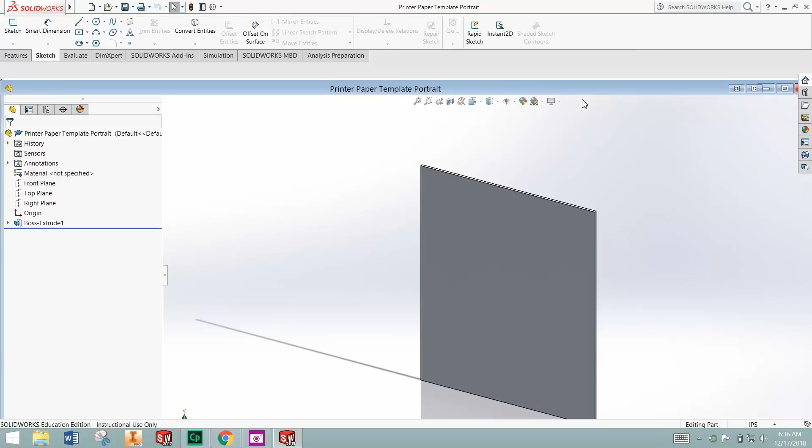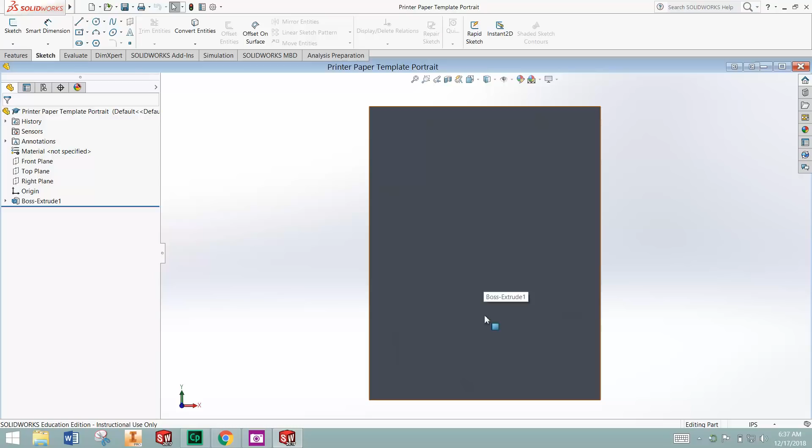So here is the starting design constraints. Everybody is restricted to an 8.5 by 11 piece of paper, your 8.5 by 11 construction paper or cardstock. To get started with this, you are going to be right-clicking on the blank or flat surface of this. So I'm going to right-click, and then you'll click on the second button of the second row. This says Sketch. Once you select that, you'll be able to start sketching or drawing your design.

Anytime we do anything in a CAD program that's going to be 3D shapes, even though we're cutting this out of flat paper, we're going to create a 3D design here in Solidworks to begin with. We always start with a sketch. So we're going to be sketching 2D lines and text boxes and importing an image, and I'll show you how to do all of that. Your primary tools will be used up here in the top left corner. These are all of these sketch tools. You'll be able to create different shaped circles and arcs and lines. Maybe if you wanted to make a snowman, you can do that with different circles.

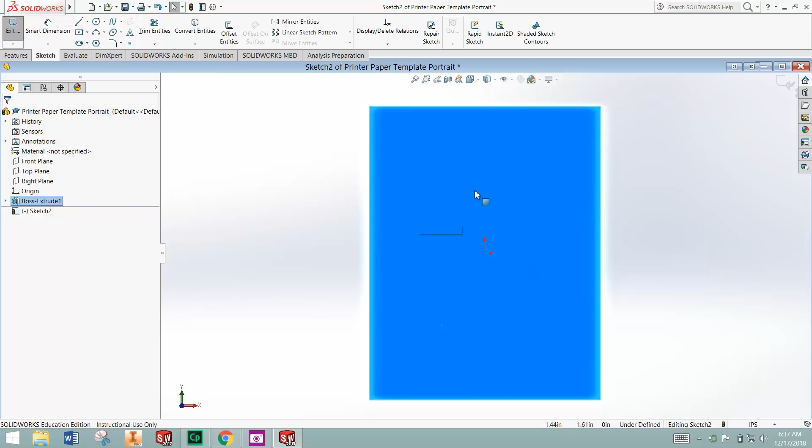So the first thing that I'm going to be doing, and this is going to be probably the one thing that people want to do the most, is import a picture so that we can have Solidworks trace it and create an outline that can be laser cut. There's one step that we have to do here first, and that is to enable AutoTrace before we import this picture. So near the top left corner, when you hover over the Solidworks logo, you'll see a menu that pops up. You are going to go all the way to Tools, then all the way down to Add-ins.

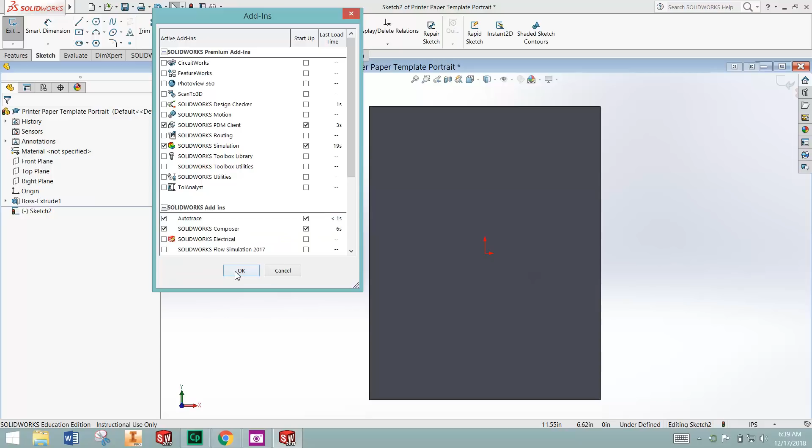When you click on Add-ins, I've already enabled this before, but almost 3/4 of the way down your screen, there's this menu for Solidworks Add-ins, and you're going to make sure that the checkbox is enabled for AutoTrace. If you don't have this enabled, you will not be able to automatically trace an image with Solidworks. You can also check this box over here for enable at startup. So anytime that you open Solidworks, AutoTrace is already going to be there ready for you to use it. Check those boxes, click OK. Great. Now we will be importing a picture.

So when you import a picture, here's what you could do. You can go to Google and you can search whatever image you want and add black and white. This of course has to be something that is school appropriate, but as long as you're able to find a really clean black and white image, we'll be able to use that and have Solidworks trace it. What I mean by really clean is that it's black and it's white, there's no in between, there's no shading, there's not lots of little lines, lots of skinny writing, and there's no shadows. There's no blurriness. If you can see on your screen lots of pixels, then that picture will probably not work well for you.

So I'm going to go back into Solidworks, and I will be opening this image here that I sketched earlier with a black marker on a piece of paper. It's a very simple outline. You can see that it's done by hand. It's a very simple outline of a VW Beetle.

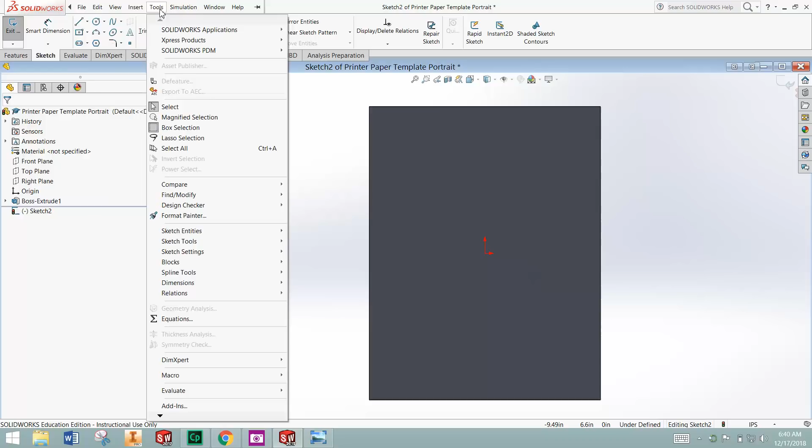So in Solidworks, when you are in that sketch mode, we're still working inside of this sketch, you'll hover over here in the top left near the SolidWorks logo. You'll go to Tools, then about halfway down, Sketch Tools. Then we'll go to that next menu and go all the way down to Sketch Picture.

When you select Sketch Picture, SolidWorks will open a dialog box and it will ask you to select a picture that you want to import. You can sometimes copy paste in here or drag and drop. That doesn't always work. Sometimes images get corrupted. This way will always work for you.

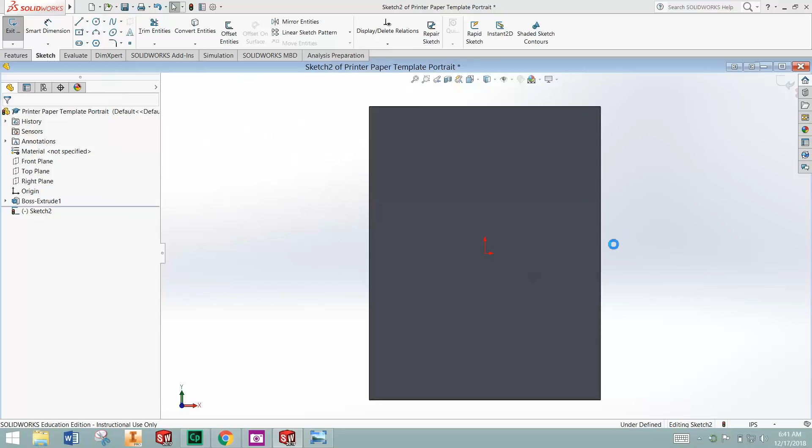So I will open this picture that I created on a blank piece of paper with a black marker, and we're going to see if SolidWorks is able to trace this even though it's not a computer generated picture. It's just a black and white picture that I brought in using Cam Scanner. So first I'm going to be shrinking this down until I make sure that it can fit on my paper. You don't have to worry about this blue line that pops up. It's just kind of like SolidWorks telling you what direction the picture is facing.

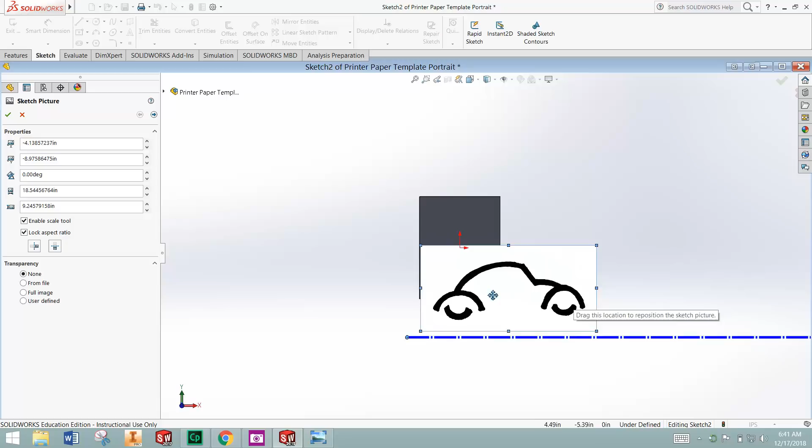So here's what's very important. If you have an 8.5 by 11 and you are folding it, then you know that you are only going to be creating a design that gets laser cut, or that cutout window so you can see the other color paper, on one half or the other of your 8.5 by 11 template. So for me, I'm going to make this cover up almost half of the way across or a little bit more on the bottom half of my card, so that when I fold this, this is front and center once it has been laser cut.

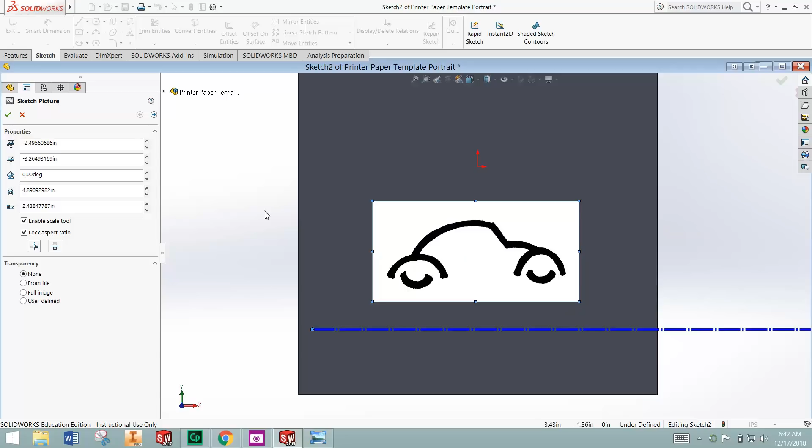So here's my picture. Once you have enabled AutoTrace in the past, there is a second little arrow that pops up here on this sketch picture menu. I'm going to zoom in so I can see this picture really well. I'm going to click on that arrow to the side. You'll see that your picture gets kind of grayed out, and you will be using this selection box to select only from what is on the inside of your image for SolidWorks to trace. So you can't start your selection on the outside.

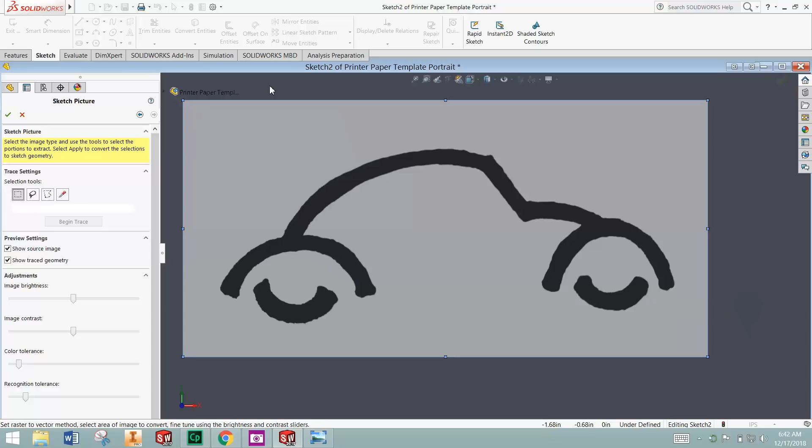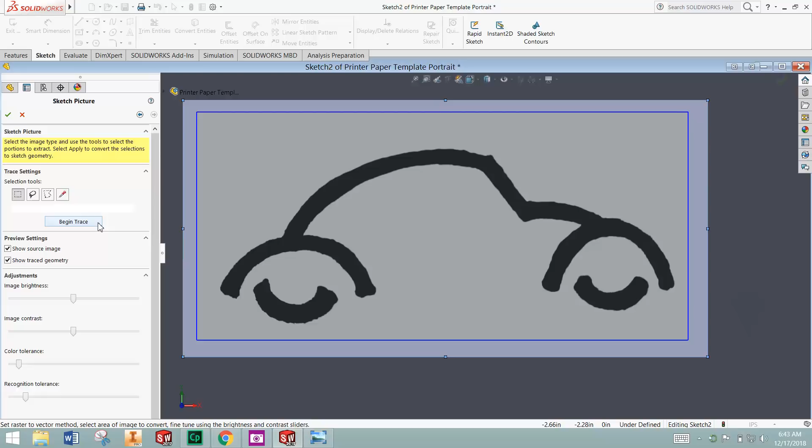You'll notice that these little blue arrows pop up. When you see those blue arrows, that's where you can drag to create the window you want SolidWorks to trace. So I'm going to click and drag. With that click and drag, I'll let go. And the next step is back here in this menu on the left to click Begin Trace. So let's see if it's able to pick up these lines. Okay, so some of these got a little bit blurry on us.

I'm not too upset by that, because what we could do is these settings over here where you have adjustments, you can slide these settings from left to right, and usually what you want is the most contrast possible and the brightest image possible, and SolidWorks will begin to change those lines around to where it best fits the profile that you have brought in.

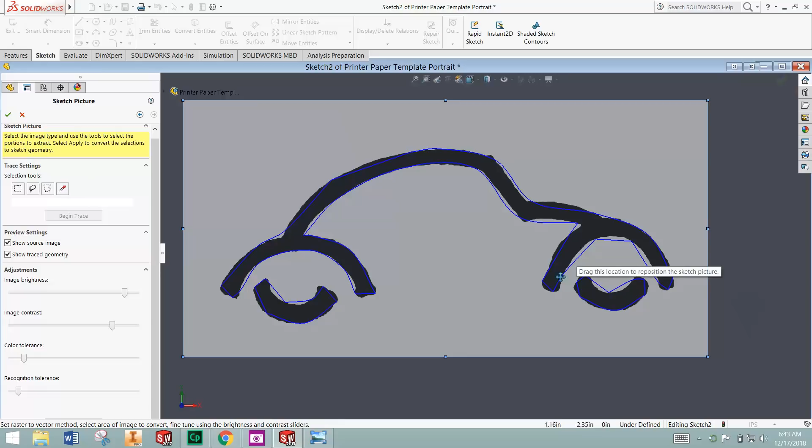So one thing I'm noticing right now already is that some of these curved lines are turning into straight jagged lines. So this is likely because I sketched this on a blank piece of paper. If you found a clean picture that's black and white and imported in here, then that would probably work much better for you. So for now, I'm going to click on the green check mark, and I have a tracing here.

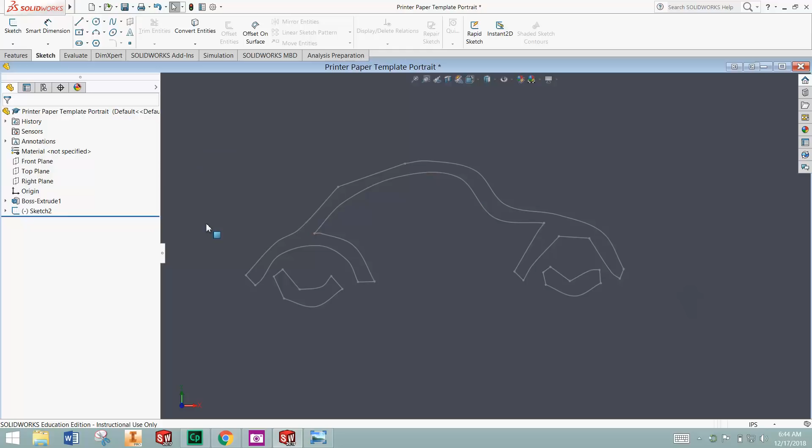Before I do anything else, I'm going to hit escape on my keyboard. Then I will right click on this picture and suppress it. When I right click and suppress, that picture will go away, but I still have this image here. So there's a couple different things that you could do here. Now this image didn't exactly come out as I would like, so I'm going to edit it using some of our sketch tools. So I'm going to go back into this sketch that we had just worked on.

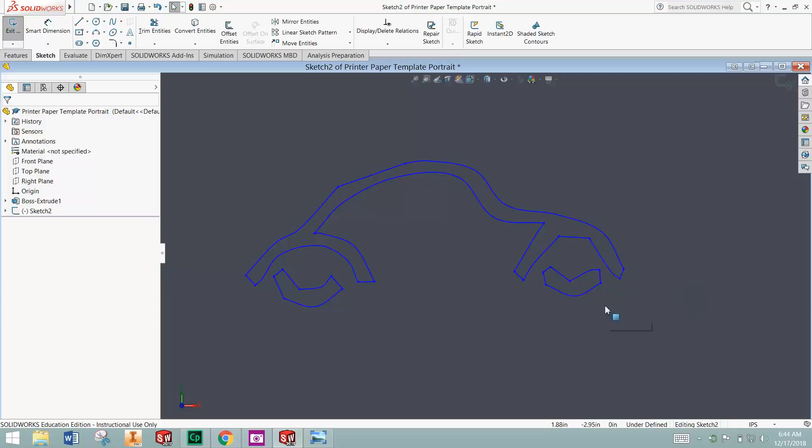Over here in your design tree on the left hand side, you're going to right click and then the first button in the first row, edit sketch. So once we have that, some of these lines that I didn't really like the way they turned out, I'm just going to delete them. So I can highlight that, clicking delete on my keyboard, delete, delete. I think this back wheel also, I'm not very happy with it, so I'm going to delete that.

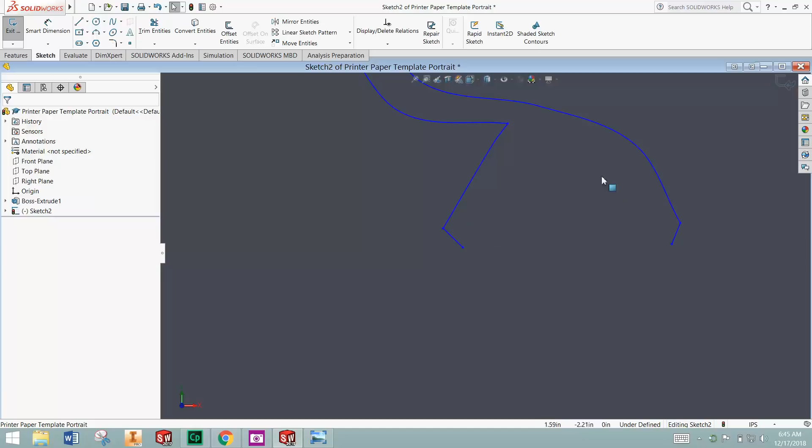Then, in this case, to recreate this arc, I'm going to be using this arc tool in SolidWorks, and the default is 3-point arc. That's going to work well for us now. So I'm going to start the arc first on the left hand side, and you have to remember to make sure you're keeping everything as a closed profile or closed loop.

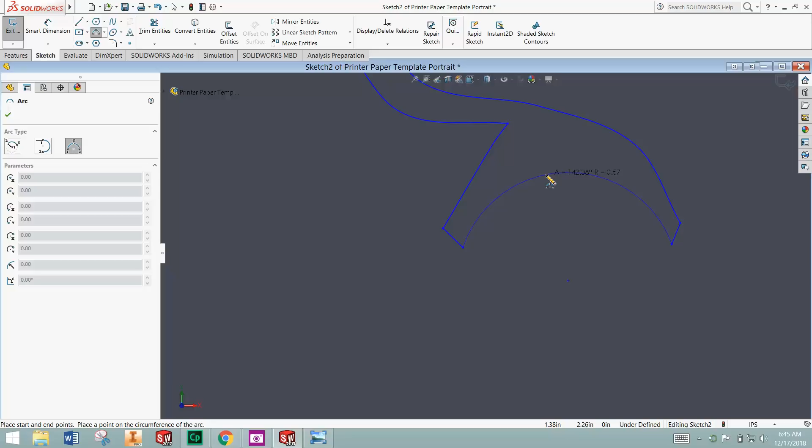So I'm going to click once on this side of the opening, click again on the other side, and then click to where I want the center to be. And I think I'm going to have it be maybe about right there. I'm happy with that. Then I'm going to create some new arcs for the bottoms of the wheels. So this is just one of the many sketch tools that you can use. There's also lines in here, there's splines, there's different circles, different shapes of rectangles.

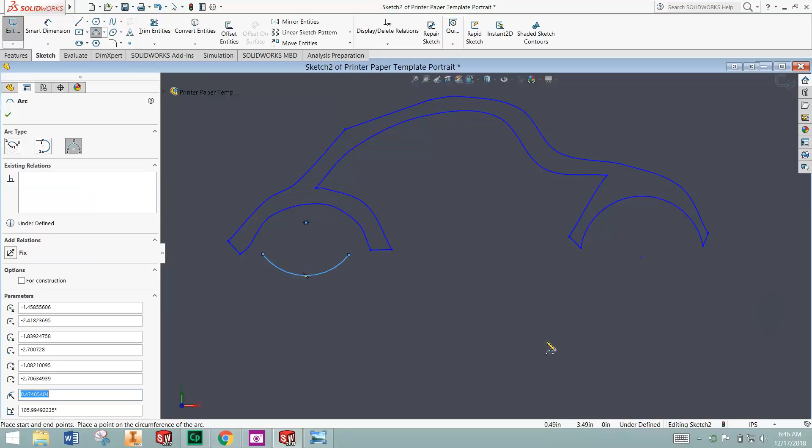I'm going to create another arc on the other side for the bottom of this other wheel. Since you are only able to cut complete profiles or shapes, I'm going to offset these lines to create a shape instead of just an arc.

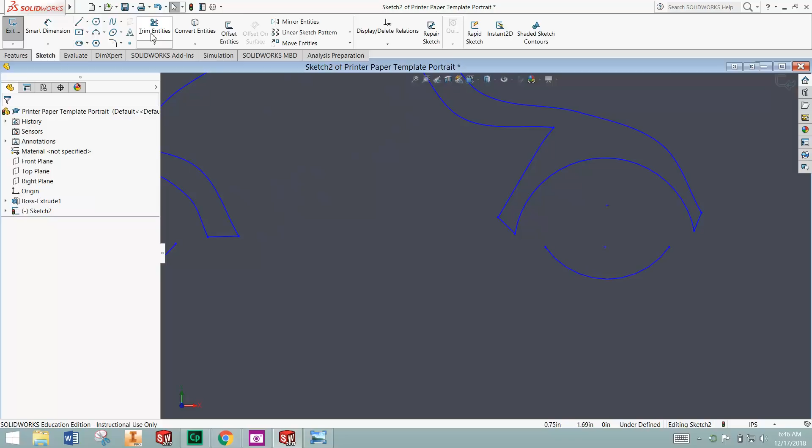Offset. I think I'm going to need about, maybe 0.5 inches. No, that's way too much. 0.2 should be enough, actually let's go even a little less than that. 0.1.

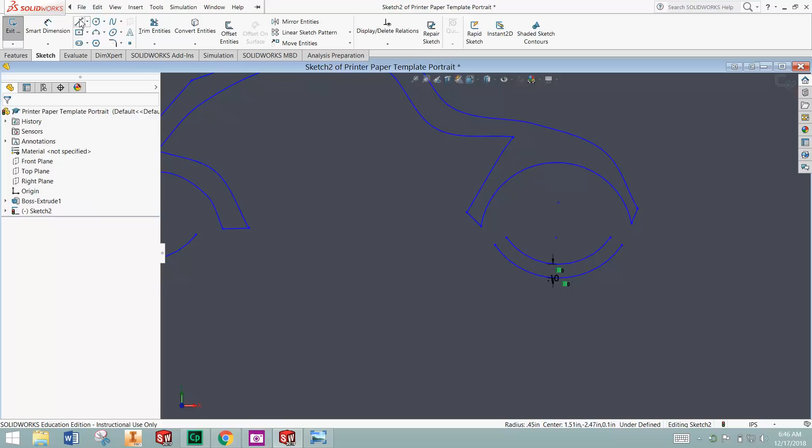So there's an offset. Now I have two lines there that I'll be able to connect and create a closed profile. Using the line tool now, I'm creating a closed loop profile. So now this is a shape, it is not a line.

Since this is a shape, we'll be able to cut out everything that's on the inside here. The laser cutter will just zap around these lines and create that arc-shaped window.

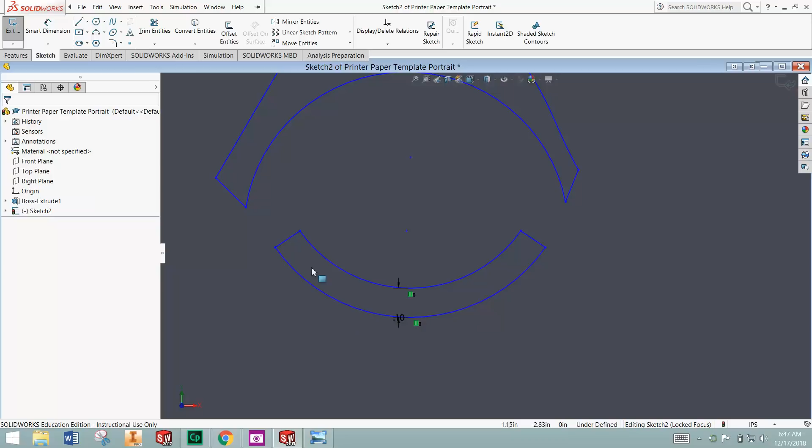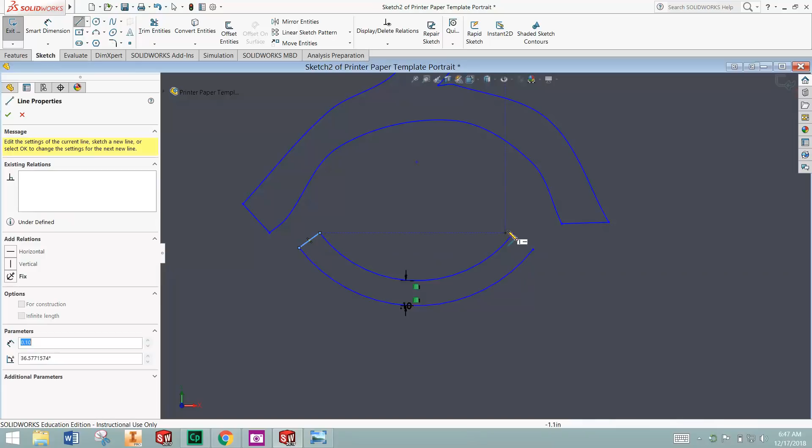Back over here on this other wheel, we'll do the same process again. So offset, I'm going to offset these lines so there's a space in between them. Then up on the top left, I'll use this line tool to connect these lines. Hitting escape, okay, great, now we have a shape that we should be able to laser cut.

Let's see if Solidworks is able to cut this out for us. Remember, I'm drawing here on the bottom half of my paper so that this shows up when I fold it in half.

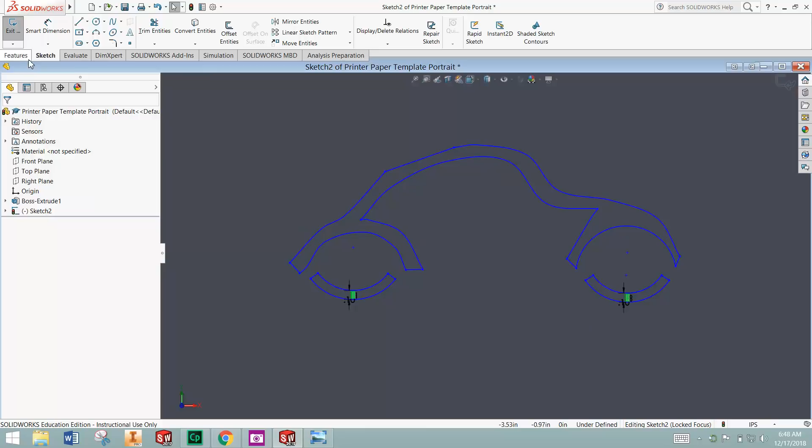From here, when I'm ready to cut this out from my template, you will be going over to this Features tab, next to the Sketch tab where we started. Features tab, and we are going to create an extruded cut. What SolidWorks will do is every shape here that we've outlined, it is going to cut that out and create a window out of that.

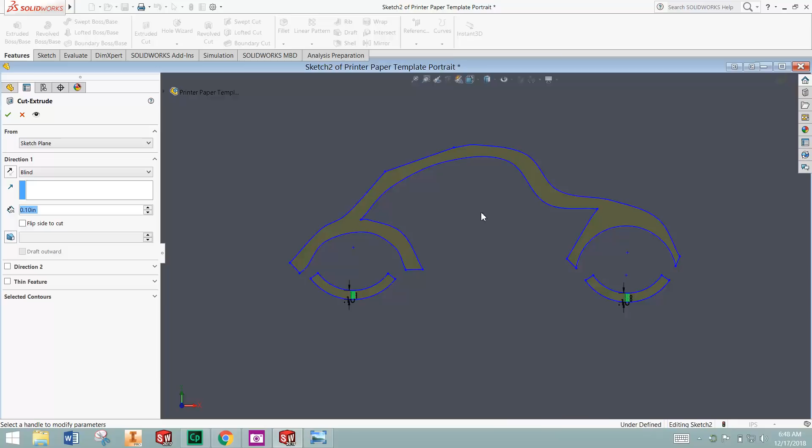So extruded cut, and if you already have shapes that are complete closed loops, SolidWorks will automatically recognize those and shade them in with this mustardy yellow looking color, and that's how you know that those are the areas that are going to be cut out.

I'm going to click this green check mark near the top left under the Cut Extrude menu, and then that shape will be cut from my template.

So there's the outline. This would be the first set of windows or things that show up, and where you will be able to see the different color of the other layer of paper behind it.

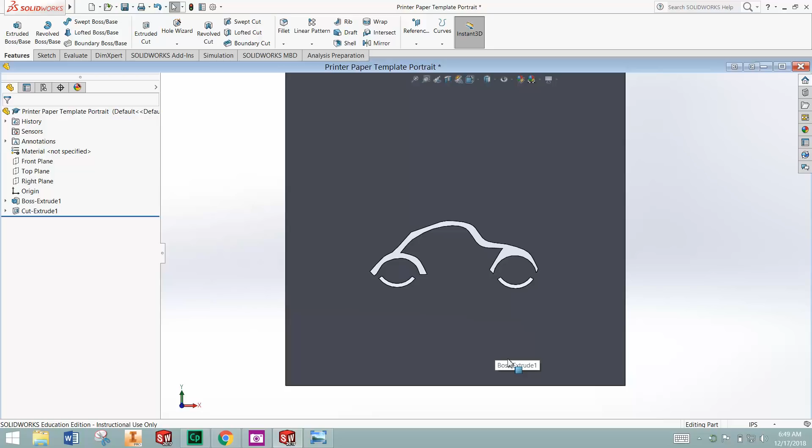Again, one of your design constraints, as you will have seen on Canvas, is that you have to have at least one image and at least one word. So here's my one image that I have created. It's an outline of a VW Beetle that I sketched by hand.

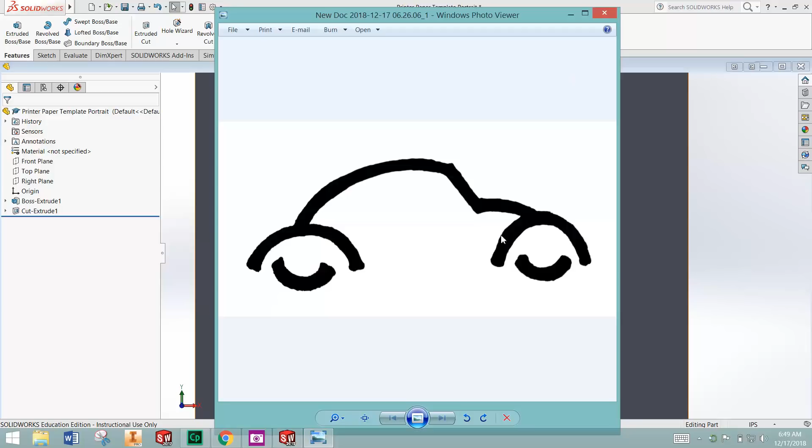I took a picture of it. Here's this picture, it's black and white. I used Cam Scanner and imported it into my computer via an email. That Cam Scanner was just an image, black and white. We did Sketch Tools and Sketch Picture to bring that in, and then we used AutoTrace to create sketch entities or lines that we were able to cut with SolidWorks.

My next step will be to create some font, and I think I'm just going to write the word Volkswagen along the bottom, and we're going to extrude cut that as well so we can have that window where we can see the other color of paper behind it.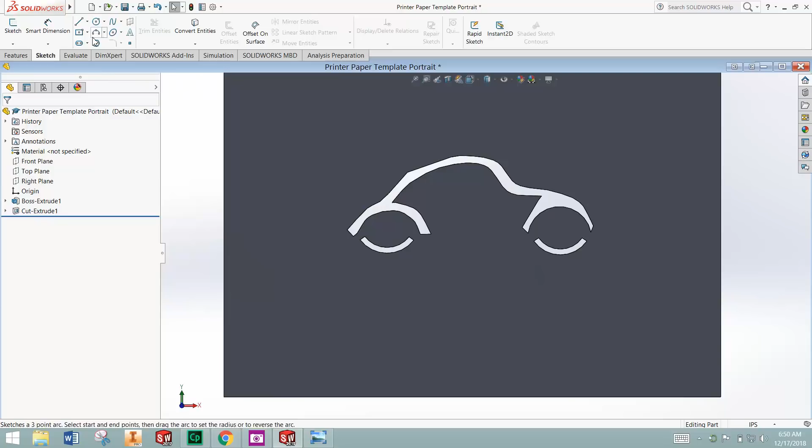So I'm currently out of sketch mode right now. If I went over here to the Sketch tab, I will not be able to make new sketch entities or lines or text boxes without first starting a new sketch. So we will start a new sketch by clicking Sketch in the top left corner underneath the SolidWorks logo.

It's asking you now, where do you want to put this sketch? I want this sketch to be on this flat surface of the paper, so we'll just click there once. Now these sketch tools will be enabled.

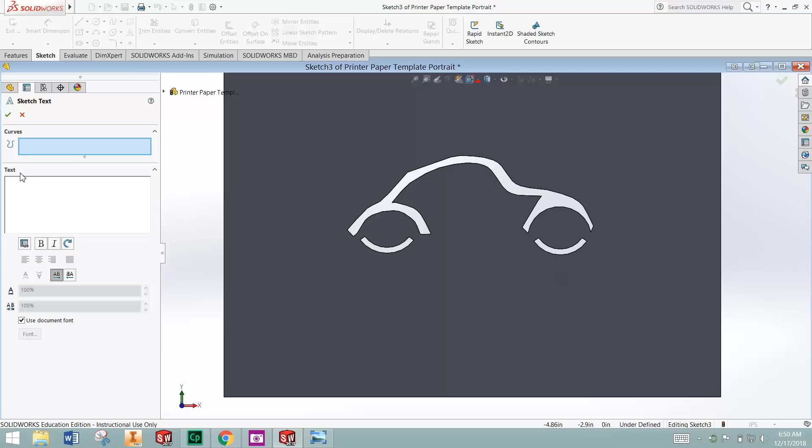I will be using this text tool, and there's a couple different ways that we can use this. One thing you are going to be doing is modifying the font to select a stencil type font. First I'm going to write the text that I want in here, writing it in all capitals, Volkswagen. I will be highlighting that inside of this text box, and then here's an important step: you want to make sure you uncheck use document font.

Once you do that, this button will become enabled for you to click where it says font. You'll click font, and we're going to go find the stencil font. Stencil font, I'm going to make this bold, and I think we're going to make these maybe 0.3 inches tall. Okay.

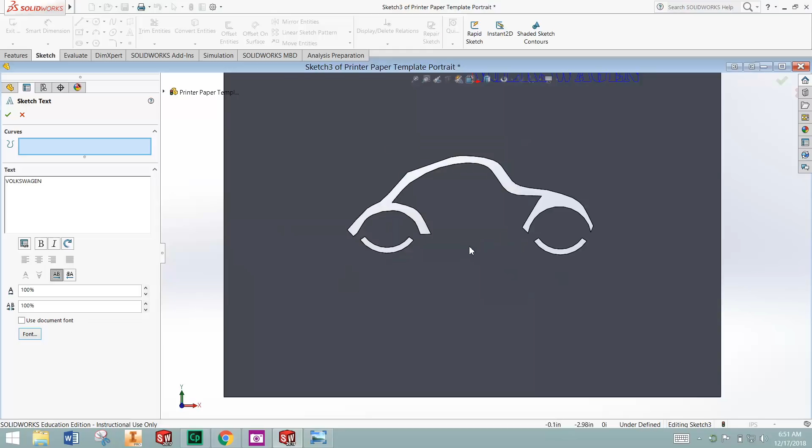Now here's our text up here right now, and it looks like we've lost part of the L. I don't know, it should pop up. We'll find out. So this text is automatically attaching itself to the origin.

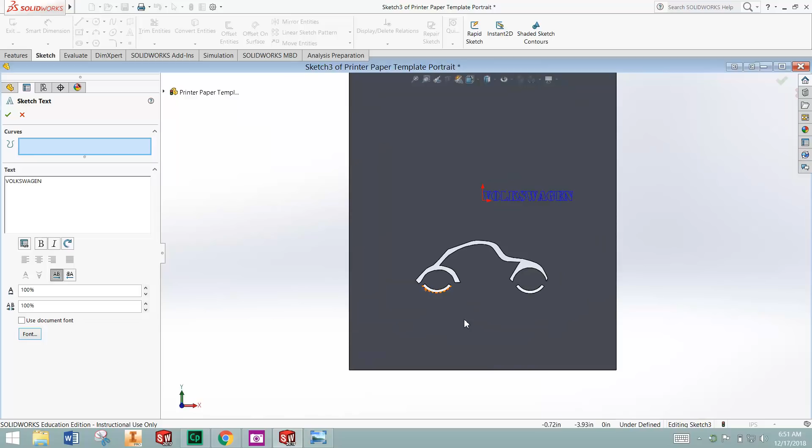We don't really need that. There's a couple different things that you can do to put that exactly where you want. But the first thing that we could do to start placing it where we want it is to create or select this green check mark.

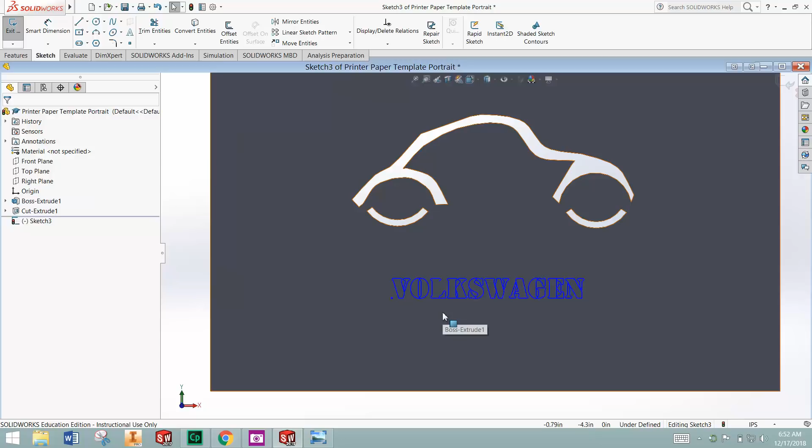Then you'll be able to just click and drag the text to wherever you want it. Now, I just clicked and dragged this text down here to where I wanted it, and I realized that this is not as big as I would like. I think I want this text to be at least as long as the sketch of the beetle. If you ever want to go back in and edit your sketch, all you need to do is double click.

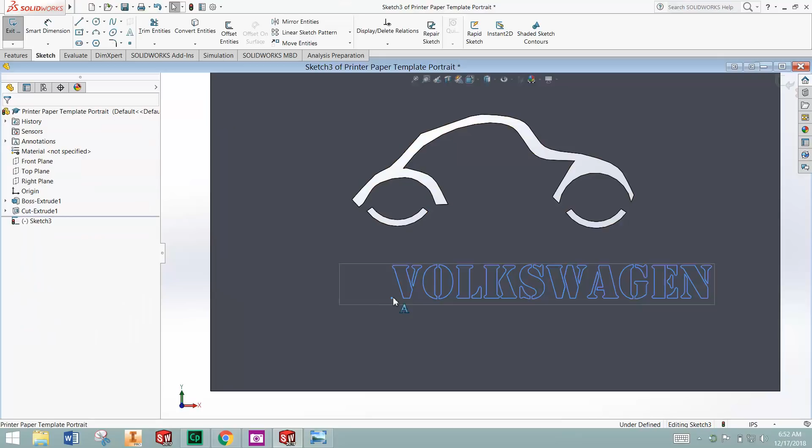Then you'll have access to the sketch text box again. You can go to font, change the type of the font, and change the size. So I will try now 0.5 inches this time. That's much better. I think I like this size a lot more. It's about the length of the car itself.

Now again, we selected sketch or stencil font because it creates these little bridges that will allow for the centers of letters like this O to show up without cutting. Otherwise, if SolidWorks exports a circle and the laser cutter cuts a circle for the outside of the O and a circle for the inside of the O, that inside of the O wouldn't be connected to anything.

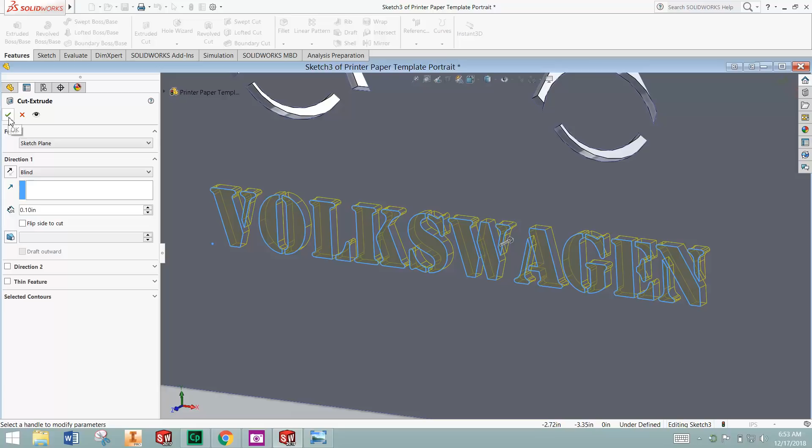So now that we have the text that we want, you will be going back to the Features tab up on the top left. We'll switch over to Features, and again select Extruded Cut. Once again, since we have closed loop profiles, SolidWorks is recognizing, hey, this person probably wants to cut out these letters here. That's great. So we're just going to go ahead and click this green check mark, and our font will be cut out. Here we go.

So here's the card, folks. So again, we drew this on half of the card so that when it folds down, we will be seeing this. Everything where there is a cutout will be a window where we can see the other color font behind it. Now here's the last step that you need to do so you can save it and send over your files.

To me for us to be able to laser cut these in class, you will be first going to File, Save As, and you want to save this as your card. For this example, I'm just going to call this VW card. You can put it in your folder for this class. Save.

Once this is saved, there is one more step. So that saved the file onto your drive or onto your computer. We are also going to be saving this file as a DXF file format so that we can send it to the laser cutter. And we do that by right-clicking on the surface of your card, just this blank surface, right-click. You will go about 3/4 of the way down and find this tool where it says Export to DXF/DWG.

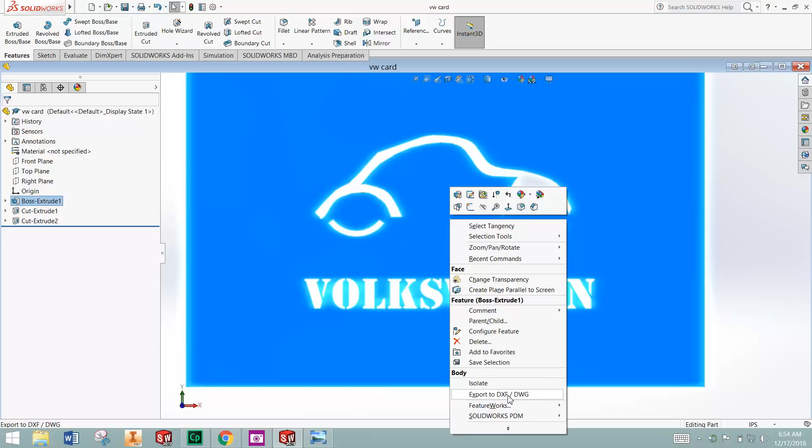When you select that, automatically SolidWorks will ask you, hey, where do you want to save this? You can save it in that same folder. And you want to make sure that the Save As type, your file format, is DXF. Click Save. And then you can click this green checkbox, green check mark.

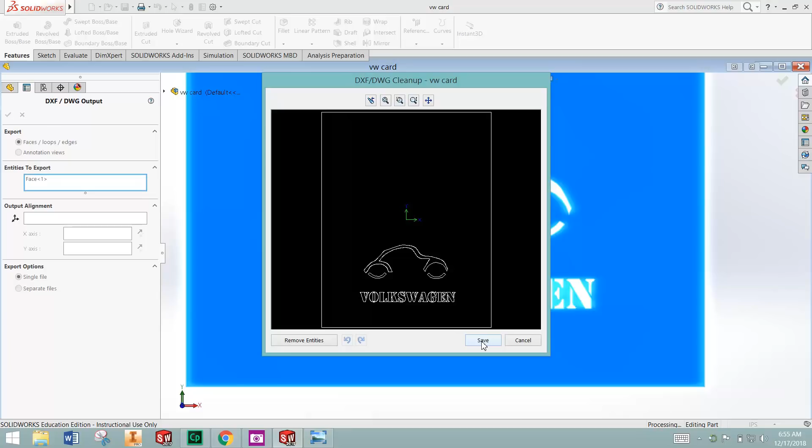SolidWorks will then give you a black and white preview, and this is the preview. It will be exported to a DXF format so that we can open this and cut it with the laser cutter. Again, click Save, and you're ready to go.

There's one last step that we will be doing, and that is that you will be emailing me your DXF. Again, DXFs only. You will be emailing these to me so that I can open everyone's file together for us to laser cut in class.